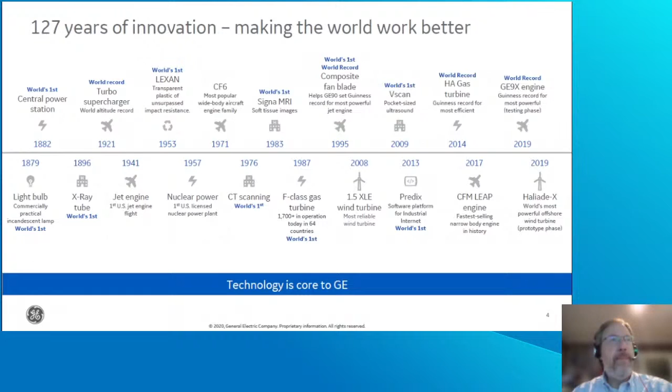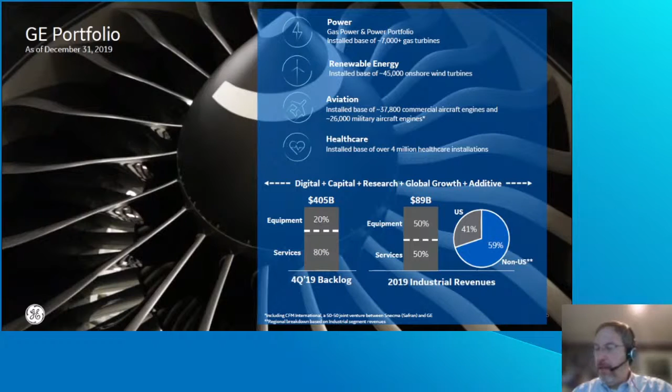Today, the company has four focal points: power generation, both gas turbine and renewables, our aviation division, and our healthcare division. Each of those brings incredible technology to the world. But as I said, I represent the gas turbine division, which today is known as GE Gas Power. This is a multinational company that spans the world, and we primarily develop power generation through the use of gas turbines, steam turbines, generators, heat recovery steam generators, and combined cycle applications, as well as the associated digital control systems that make it all happen, and a world-class field installation and services organization.

The focus today is on the use of hydrogen for decarbonizing power with the use of gas turbines, and that's what the rest of the presentation will focus on. But I do want to spend a moment and reflect on the fact that as we think about decarbonizing and using gas turbines, there's more than one way to do so.

We can think of this as changing the fuel that goes into the gas turbine and making the fuel either have zero carbon or renewable carbon. Or we can look at this by removing the carbon that might be emitted by the gas turbine in some sort of post-combustion process. On the pre-combustion side, we can talk about the use of hydrogen.

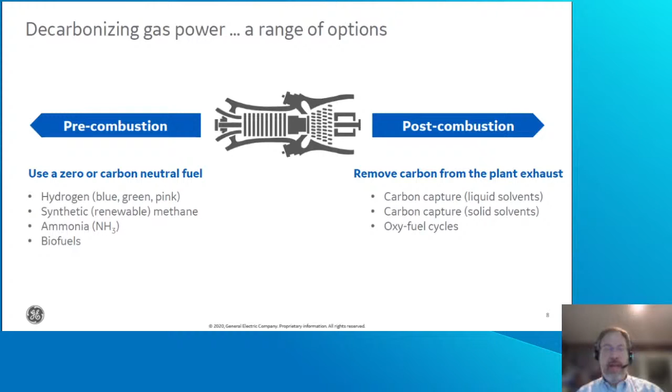But let's really focus on the use of hydrogen. Let's talk about the experience that we have with hydrogen. What are the capabilities of gas turbines? What's the combustion technology that's really needed?

Finally we'll wrap up in a conversation around what does it mean to put hydrogen into a gas turbine from the plant level. It's not just the gas turbine we have to think about, but we do have to think about the entirety of the gas turbine combined cycle plant, or the gas turbine plant, and all the ways that hydrogen could impact it.

So the first thing I want to do is take a moment and talk about the differences between hydrogen and methane. Again, methane is the primary gas in natural gas. Typically, natural gas is composed of anywhere between 85 and 95% methane. So its chemical characteristics and combustion characteristics matter significantly. We want to compare those to hydrogen.

We'll start off with the second line in this chart, the molecular weight. Hydrogen is a lighter molecule. It's therefore a smaller molecule. And although we have systems where we use natural gas or methane that don't leak, putting hydrogen into those same systems could create a leak hazard.

Hydrogen's flammability characteristics, that's the first line in bold, differ from that of methane. Upper and lower flammability limits really mean what's the lower mixture concentration and upper mixture concentration that hydrogen will actually burn in air. You can see the lower end is about the same as methane or natural gas, but the upper end of hydrogen is significantly different, meaning that if you have a mixture of hydrogen and air, it will burn at a much higher concentration than methane would. That creates concerns about safety should we have a hydrogen leak, especially in enclosed spaces.

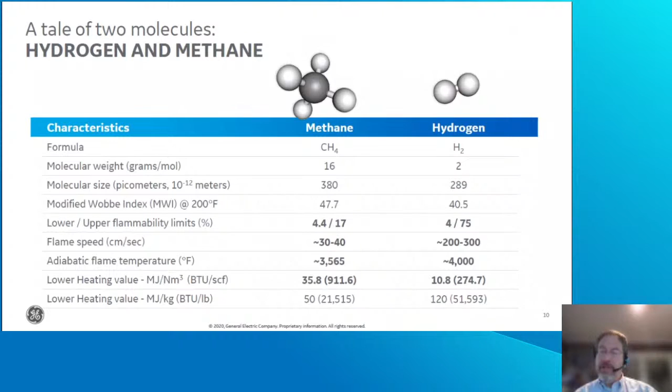Hydrogen will burn hotter than methane, and that has implications around the production of NOx or NOx emissions. It also has a different heating value, so its energy density on either a mass or volume basis is different. Again, that has implications as we think about moving hydrogen through pipelines. On a volumetric basis, it's 1/3 as energy dense as natural gas, which means to carry the same energy density, our pipes could have to be bigger. So we have to think about all of these fundamental differences as we think about using hydrogen not just as an energy carrier, but as a fuel for power generation.

So I want to spend the next few minutes talking about where does hydrogen as a fuel sit in a spectrum of other fuels, and a little bit about experience.

So the chart I'm showing here, let me start by explaining what it is. I'm plotting the heating value of the fuel. On the vertical or y-axis, I'm plotting it on a per mass basis, so kilojoules per kilogram. I've divided by 1,000 just to make the numbers on the scale a little easier to read. On the x-axis, I'm plotting the energy of hydrogen on a volume basis, so kilojoules per cubic meter, again divided by 1,000 just to make the numbers on the scale easier to read. And I've divided the chart into 5 zones.

The first zone, number 1, is natural gas, LNG, methane, and shale gas. These are all gases that are predominantly methane. Now, if we want to think about the use of higher molecular weight hydrocarbons like ethane or propane or butane or LPG, we would move to the right on this chart, where the large number 2 is.

Now, what we're talking about today is hydrogen, so we want to focus on a different aspect of the chart. If we reset ourselves to that natural gas zone number 1 and move to the lower left on the chart, you can see we pass through a region labeled number 3. This is a region of fuels that we call medium BTU fuels. Some will call them medium heating value natural gas fuels or lean methane fuels. These are naturally occurring fuels where methane is no longer, let's say, 80 or 90% of the fuel, but more like 60 or 70%, and the remainder might be nitrogen or carbon dioxide.

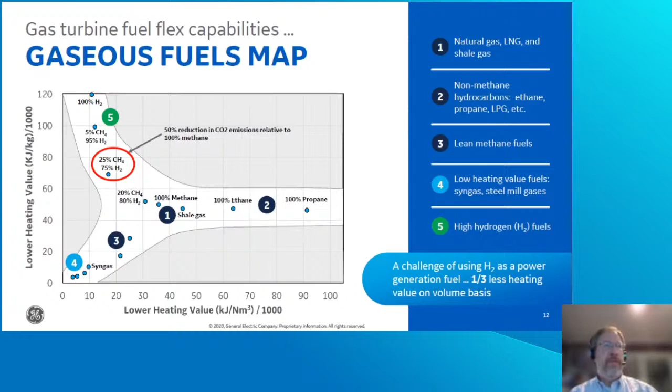The kind of statistic I like to give, from at least a General Electric perspective, is if we totaled all the units we've supported over this 30-plus year period, that represents more than 75 gas turbines. And these gas turbines have accumulated more than 6 million operating hours on these fuels. So again, this is not a new phenomenon, this concept of using hydrogen to make power. What's new in our world today is that we're thinking about using hydrogen explicitly made for power.

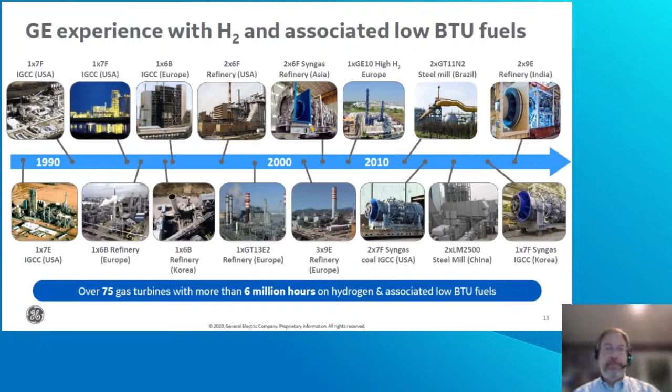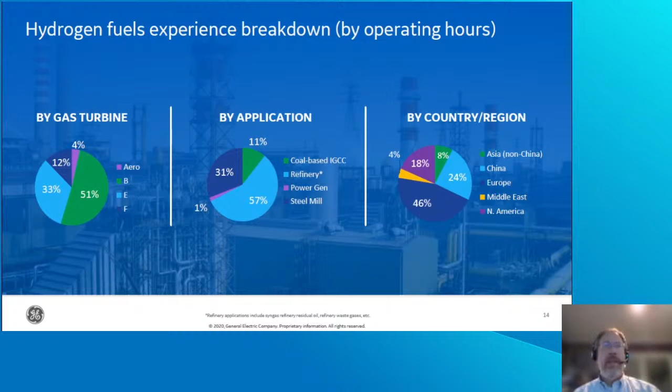Again, we've talked about this just a little bit on the last slide. This is a little more specific data, right? At least from the GE perspective, as we look at how we've used these fuels across our different gas turbines, as we use them in different application spaces, and as we've used them in different parts of the world.

GE also prides itself on being a leader in this space. This is third-party data from a group called McCoy. It just shows that GE has received more awards, more units, and more megawatts of awards in this space. So again, we pride ourselves on having industry-leading experience with using hydrogen and other similar low heating value fuels.

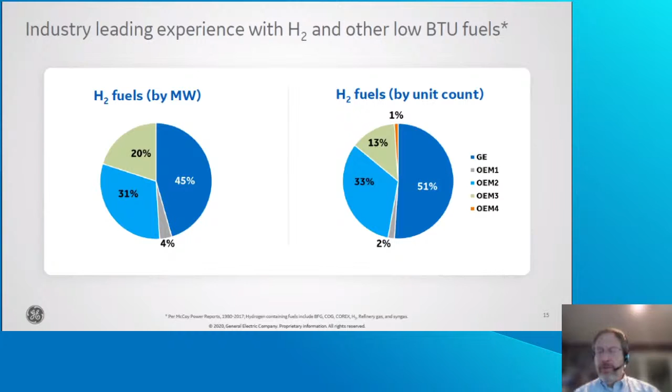I want to talk through a couple specific examples. I think they're important as we think about the use of hydrogen for power, because we can think about this in two scenarios. One where you have a gas turbine, maybe a new or existing one, and you get some amount of hydrogen available, but it's not enough to fully load the gas turbine. So you might want to start blending hydrogen into your natural gas and slowly start reducing your CO2 footprint. The other extreme is you have a very large amount of hydrogen available, and you want to run your gas turbine primarily or completely on hydrogen.

So I have 4 examples here for you. The first 2 on the left are in that initial scenario where you're going to blend hydrogen into existing natural gas. We've done multiple projects with customers around the world where they've had some fuel with some amount of hydrogen, and we've blended that fuel in with natural gas. That requires some special hardware to do the blending so that you actually have control over the ultimate mix of the 2 fuels.

The example second from the left, where you can actually see some piping, that's a scenario we did about 10 years ago on an F-class machine where we actively blended hydrogen into the natural gas and brought that to 4 gas turbines at a site in the US.

Now, the other extreme we talked about is what if you happen to have a source of hydrogen that could fully load your gas turbine? Is it possible to run a turbine on very high levels of hydrogen? Again, the answer is yes, and I want to give you some examples.

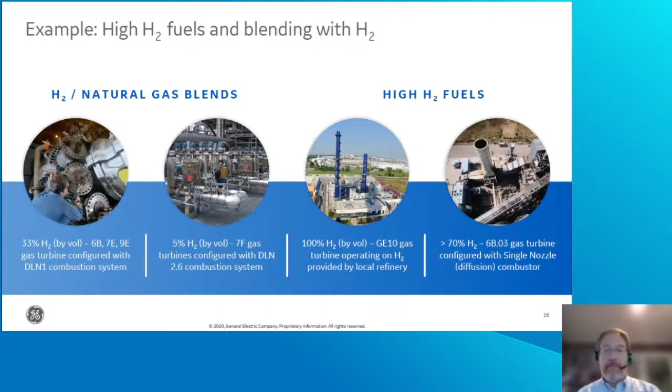Now, different gas turbines have different capabilities for running on hydrogen, and not every gas turbine is configured the same. This is just a snapshot of the GE portfolio. We break our gas turbines down into 4 categories. The first is aeroderivative engines. I've used that term a couple times - for those not familiar, it literally means we've taken the core of an aircraft engine, but now we're not using it for thrust. We package that, connect it with a shaft and a generator, and now it produces electrical power. They're very small units, can ramp up and generate power very quickly, and their power output could range from as low as about 25 megawatts to over 100 megawatts.

So we have aeroderivative turbines, our B and E class turbines, our F class, and our latest HAs. You can see differing capabilities depending on a number of factors on those. But the big message here is whether it's 100% capable today or not, GE has technology pathways to get all of those gas turbines in the future to running on 100% hydrogen. So as the power generation industry evolves, as hydrogen becomes more available in places where it becomes that pathway to decarbonization, you can take a gas turbine and get it to running at or near 100% hydrogen, lowering that carbon footprint.

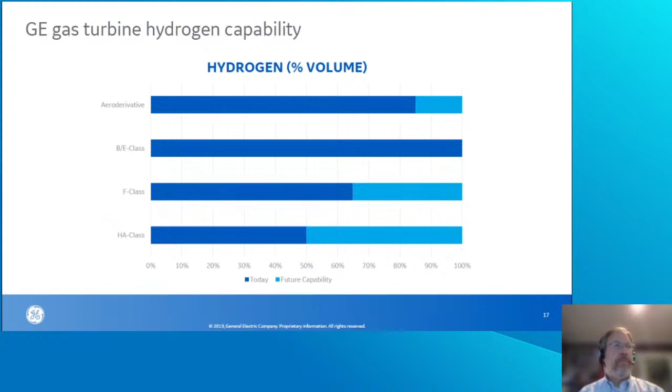Now, I do want to take a few minutes. We've talked about capabilities, but I know sometimes I get asked, well, how do you know? How do you know that you have the capability of that combustion system to burn hydrogen? You talked about how it has very different characteristics. How do you know that your combustion system will be able to operate on it? So I do want to share with you a few slides and spend a couple of minutes talking about our combustion facilities.

This is an aerial view of one of our facilities, in South Carolina. This is our gas turbine technology lab, and it's one of the places where we do combustion testing of hardware. We have other facilities in the US and other places around the world where we can do testing, but this is really the prime location because we can test very large scale systems here. As we talk about wanting to burn hydrogen or different fuels, you obviously need a supply of fuels. So this facility has a very large gas storage system associated with it. We can store all sorts of gases - you can see the picture on the left here.

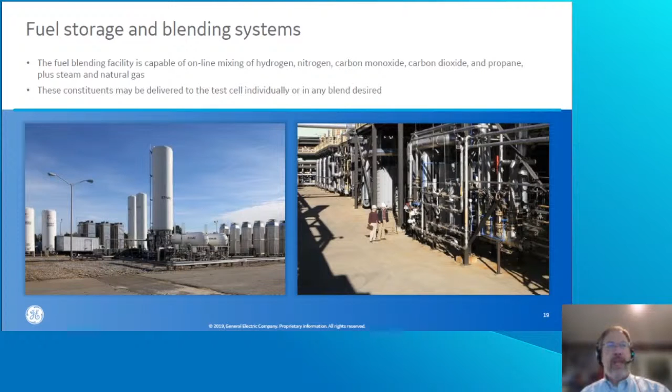This is a picture of one of our actual combustion test cells, or combustion test stands. It's actually hard to see the combustion hardware through all this because we're running a full-scale production combustion system. We run it at what we call full speed, full load conditions, meaning full pressure, full temperature, and full airflow through the system. The infrastructure manages air that's in many cases preheated to a temperature on the order of 800 to 900 degrees Fahrenheit.

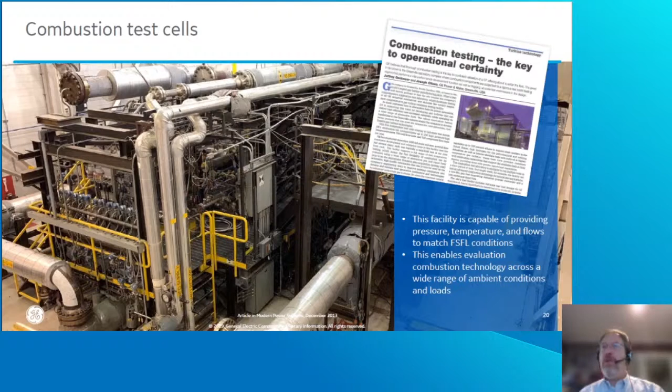In the combustion system itself, I like to use the analogy that the air flowing through is like a race car. It's going to flow through at about 100 miles an hour. So you need the infrastructure to handle those velocities and those temperatures. When you look at this image, you don't really see the combustion hardware. What you see is all the infrastructure and instrumentation to do that.

What's amazing is the amount of data that gets collected here. This system has the capability of collecting data from over 400 sensors, whether it's temperature, flow, pressure, or emissions. The test itself may only last 4 or 6 hours, but engineers will spend 4 or 6 weeks preparing for it, and then may spend weeks understanding all the data and everything they've learned before they come back to the lab for the next test.

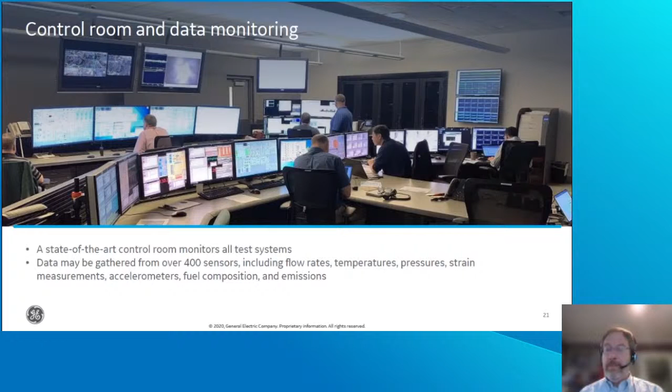This facility gets used on a regular basis by many of our engineering teams as they develop new combustion systems. They push the boundaries on existing combustion systems, and we try new fuels and new combinations of systems. It really is a workhorse facility to validate the work that we do in combustion. The reason that's important is it gives us a window into the kind of work we're doing as we develop new combustion systems or apply them to new fuels like hydrogen.

Now, all throughout here this time, other combustion systems were being developed, the so-called dry low emissions, DLE, or dry low NOx, DLN, combustion systems. Those are combustion systems that provide very low NOx when operating on natural gas. The combustion systems I'm talking about here are the ones using hydrogen or other low BTU fuels, which were paramount for many of the industrial type applications we've worked on.

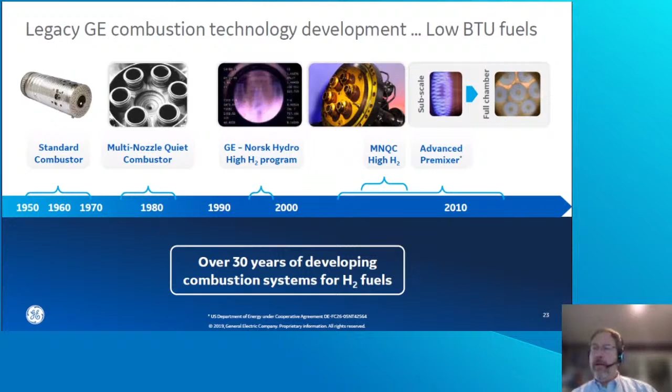And that's important because that technology that was developed became the fundamental technology to anchor our next generation combustion system within General Electric. So I want to spend a moment sharing that with you, because the way that combustion system was developed provides some real insight into maybe the future of burning hydrogen.

For a number of reasons, and some we've talked about earlier, talking about the difference between hydrogen and natural gas, under the right circumstances, hydrogen will do what we call flashback. The flame will want to propagate back upstream into those fuel mixers, and that can do damage to the hardware. So as you put more and more hydrogen in, its reactivity starts to dominate. So what would a combustion system look like where your fuel is predominantly hydrogen, and therefore the reactivity is based on hydrogen chemistry? So we went effectively back to the drawing board.

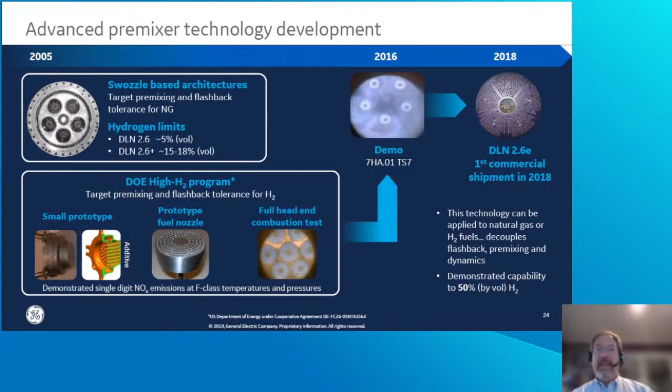So the last topic I want to talk about today, going back to original themes, is what are the implications of taking hydrogen and putting it into a gas turbine, and the impact not just to the gas turbine, but to the entire power plant. Because ultimately, power plants are systems, and we can't think about the use of hydrogen in the gas turbine only. We have to think about the overall implication to the power plant. So we can think about this in terms of what is upstream of the gas turbine and what is downstream of the gas turbine. But I do want to mention one or two things about the gas turbine first.

We've talked about combustion systems. Obviously, gas turbine controls have to be updated as we think about changing fuels. But the other good news is we fundamentally are not changing the compressor. We're not changing the turbine or hot section. So adding hydrogen, for the most part, really means, from a hardware perspective, all you're changing, if you're changing anything, is the combustor on the flange-to-flange gas turbine.

But it's very different as we think about what happens upstream of the gas turbine. So hydrogen comes onto your site. You now have to maybe store the hydrogen - we'll come back to that in a moment. But now you bring it into your gas turbine fuel system, and there are things we have to think about from a compatibility, reliability and safety perspective.

First of all, if you're going to blend hydrogen in, you need a system capable of doing it, both hardware and the controls. We have to think about any surface that has an elastomer used for sealing, whether that's a valve or pipe flanges. Some elastomers degrade more substantially over time when exposed to hydrogen. We know that some alloys of steel are more susceptible to what's known as hydrogen embrittlement. So as we bring hydrogen into a fuel system, we have to make sure the materials in that system are compatible with the use of hydrogen.

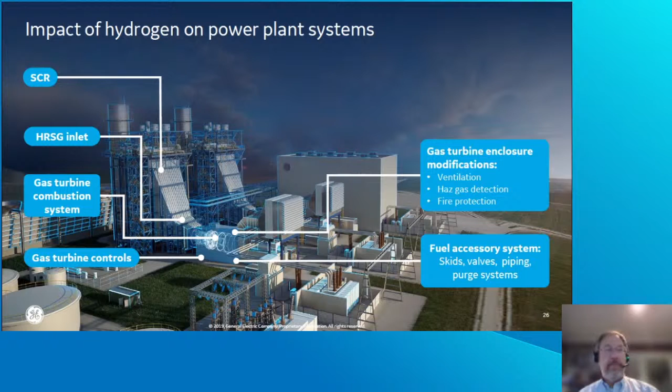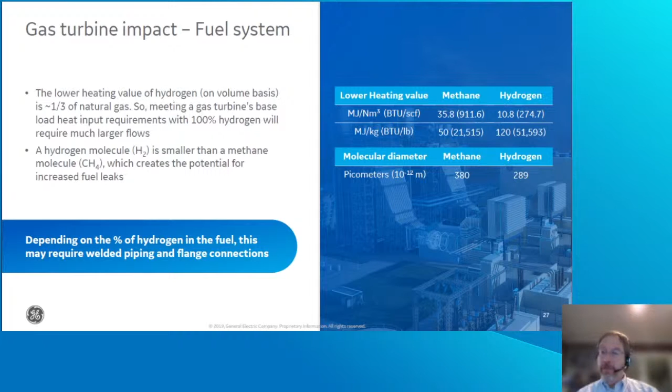We mentioned at the beginning that hydrogen's heating value on a volumetric basis is one-third that of natural gas. So depending on how much hydrogen you're using, as you increase the volume of hydrogen you want to put into your system, you may have to make your piping diameters slightly larger or larger to accommodate the additional flow, so you keep giving the turbine the required energy input.

So it's important, as we think about adding hydrogen to a system, to consider the implications for NOx emissions. That's critically important for existing power plants, because they almost always have an air permit or are regulated by a local body as to how much NOx they can emit. So as we add hydrogen to a system, we have to be cognizant of how much NOx increases, and what that means for an existing plant's regulatory limit.

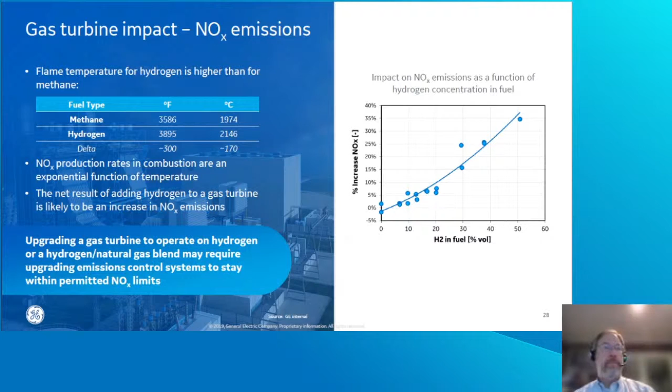So we have to think about what the implications are for this. If we went back to the slide with the power plant overview, one of the things we think about from a safety perspective is ventilation. Not so much an issue in an open space, but if you're in an enclosure, let's say around a gas turbine, as we add hydrogen to the fuel, we want to make sure we have proper ventilation in that system. So if there's a leak, we continually pull enough fuel and air out and replace it with fresh air so we don't allow a flammable mixture to build up.

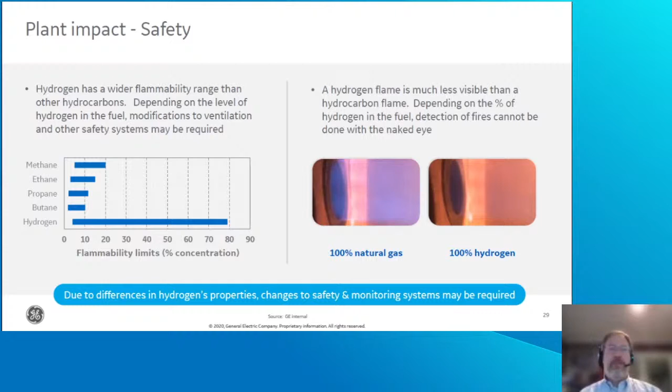Now, I kind of brushed this aside at the beginning, just saying hydrogen comes to your site. But how is the hydrogen actually coming to your site? Is it coming as a compressed gas via pipeline? Is it coming in a tube trailer system? Are you going to have storage on site? If hydrogen is being transported to you via ammonia, as a stable room temperature liquid, how are you going to decompose the ammonia back into hydrogen? What are the local regulations around bringing hydrogen in? Does it change some of the safety permits your plant operates under? There are lots of considerations as you think about bringing hydrogen to site, what form it's coming to you in, etc. Those could have implications as you think about your plant.

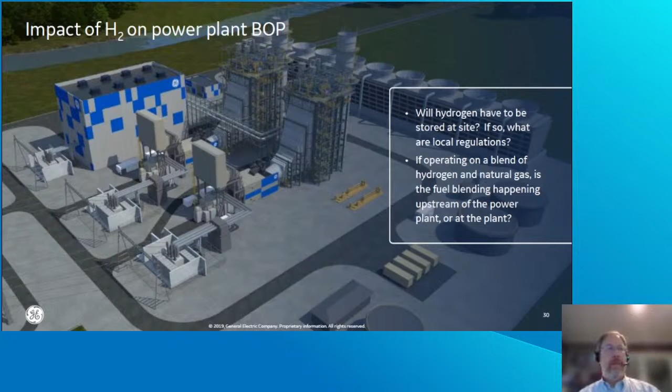So a couple closing thoughts, and then I know we've got some time for Q&A.

I talked about this earlier, about the implications of using hydrogen and lowering your carbon footprint. Ultimately, that's why we would use hydrogen. But because of the differences in hydrogen's heating value, both on a mass and volumetric basis relative to methane, when we think about how much hydrogen we put into a gas turbine and the carbon reduction we get from that, it turns out it's not intuitive and straightforward unless you've got it set up correctly. If you were to measure your hydrogen input on a mass or energy basis, the carbon reduction would be 1-to-1. So if by energy you put 30% hydrogen into your gas turbine, you'd get a 30% reduction in carbon, because energy and mass are effectively the same.

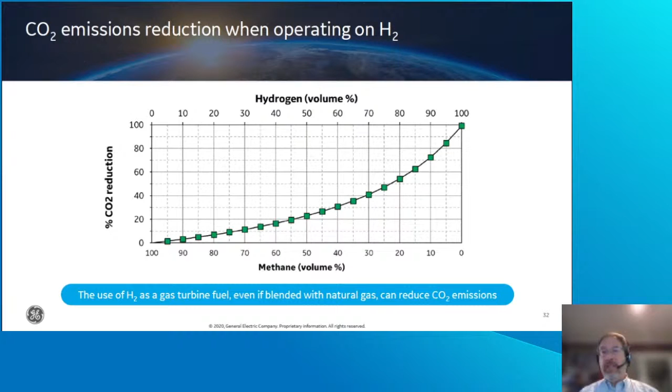So I want to wrap up with just two final slides here. The first, just to bring us back to where we started: the industry has tremendous experience working with hydrogen. GE leads in this space. All of the OEMs, including GE, have continued developing their technology. At GE, we're especially proud of this new combustion system we have and its capability to burn very high levels of hydrogen. And GE is ready to partner with our customers—we are ready for this low carbon, decarbonized world.

My role within the company, after 19 years, changed this year. I was asked specifically to focus on hydrogen and decarbonization. I think that's a sign of where the world is going and how important this is.

We only had a short amount of time today to walk through this, and there's a lot of material that is available. I want to point you to a particular website from the GE perspective. We have white papers available, we have done multiple webinars, and we have tools available to do some of the calculations I showed you about CO2. This is a website that's available to the public.